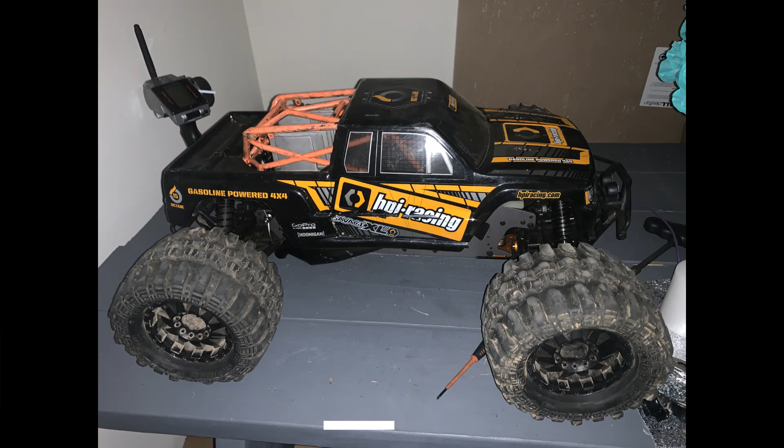Hey everyone, making this video because I recently bought a used Savage Octane. Picked up yesterday from a guy, no more than 15 years old, I think. I'm gonna send this video to him, so hopefully he's not offended. He said he traded the truck for an airplane and hadn't gotten it to run since. Saw it on Facebook Marketplace, made a deal, went and picked it up yesterday, and brought it home.

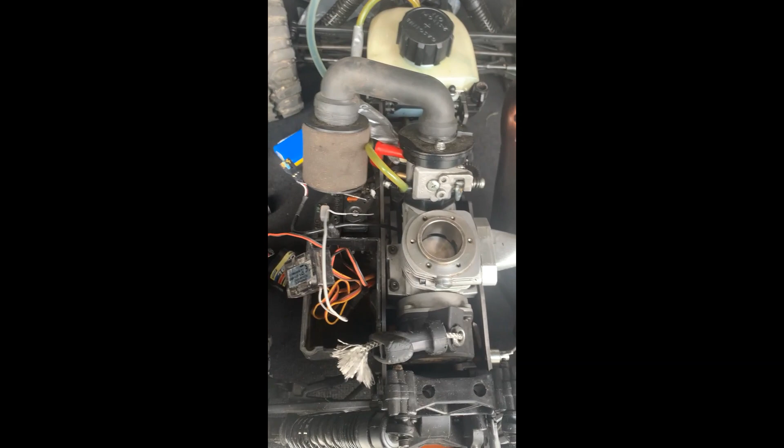Started to check out the truck. I'm gonna do a flip screen here to show you. Yeah, so this is the truck. Again, Savage Octane. It's a gas engine.

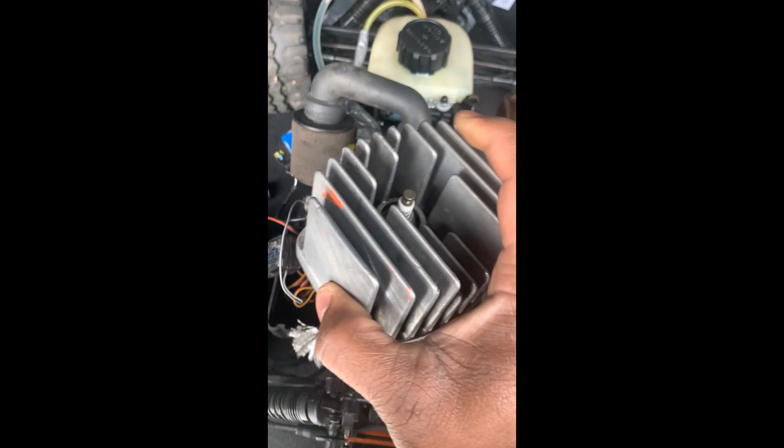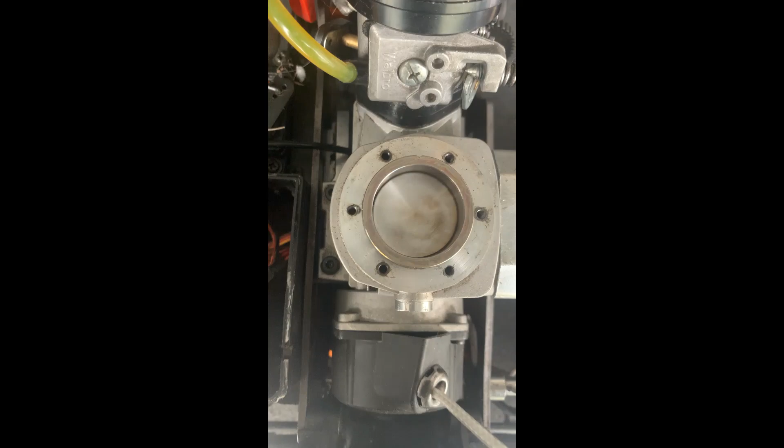He said it wasn't starting, so the first thing I did was take off the head. The shim is there, the head button looks really clean, the piston is actually pretty clean as well. So I'm assuming the piston is fine, because you have to have compression. I don't think that's the reason why it wasn't starting, so that's a good sign. The pull start is working good.

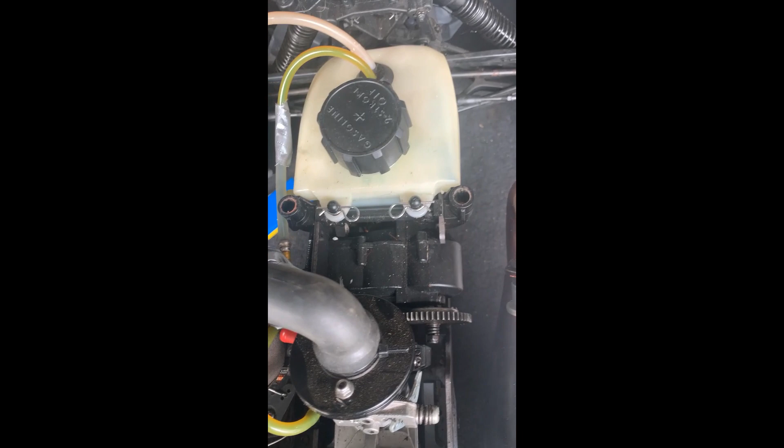What I'm gonna do - I did not get the CDI ignition coil with it, so I have a spare one, I'm gonna throw that on there and try to fire it up. I'm also gonna change the fuel lines and change that gas out, put some of my mix that I have, my 25-to-1, make sure it has the right mixture, and just try to fire it up.

Even if it starts, I'm going to do a full rebuild on this. I'm going to take it apart, take out the carb, clean the carb, take out the transmission, and look if everything is good. May put a new pipe on here, I see it's dented. Header looks fine. I'll know if it's leaking after I start running it, after it goes through a heat cycle.

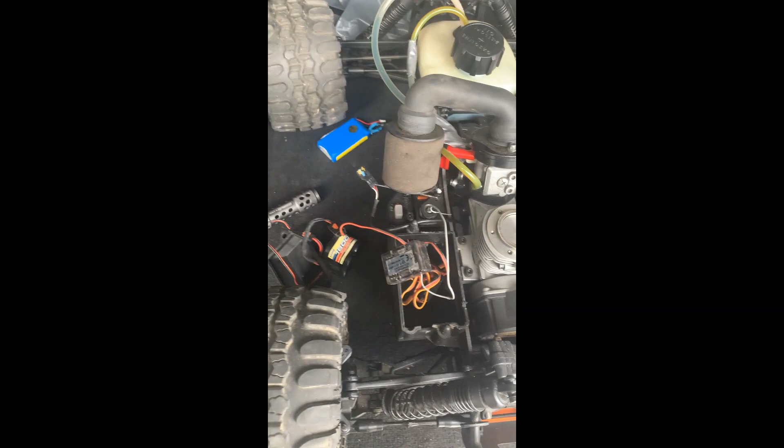But the truck looks decent. The chassis is good. It has a reverse in there. Right now it's locked up, I think it's stuck in reverse. The transmission is spinning freely both ways.

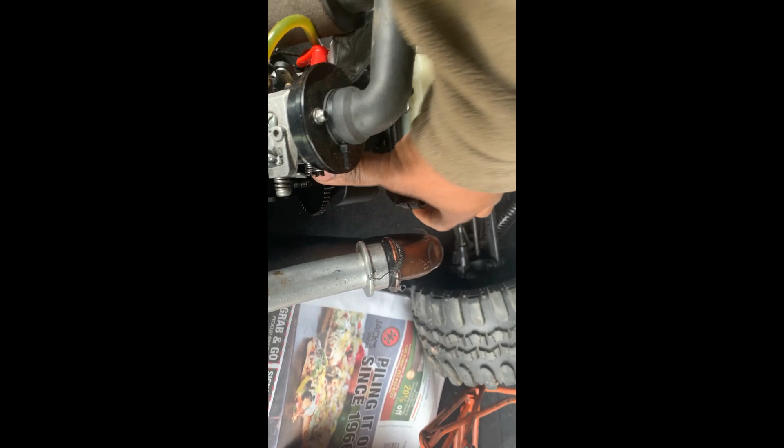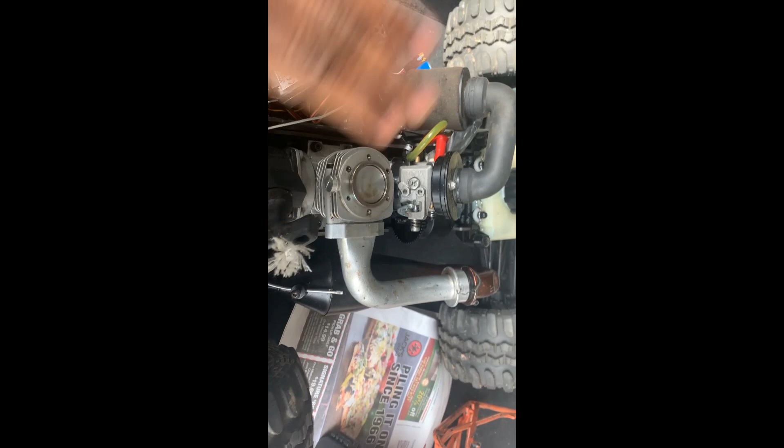So it's looking like the reverse is broken, the reverse module. I'm going to take that apart, I'm actually going to remove it. I have a bunch of cars with reverse modules in them, they can be finicky at times. I don't need it in my truck. I put it in my daughter's truck because she likes to see them going in reverse. That's fun for her. But I'm going to take everything apart, do a full rebuild on it, and see, go from there.

But the first thing I'm going to do, I'm going to get a CDI from one of my spares, and just try to fire it up with some fresh fuel and see if we can get it started. Next video, hopefully we will see it running or trying to get it started up.

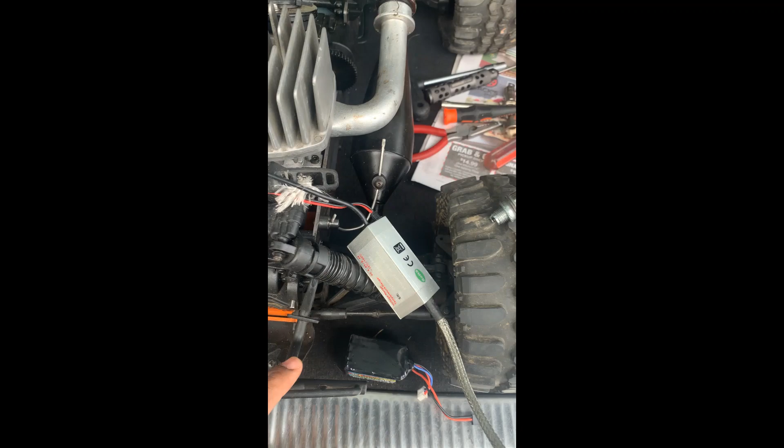Okay, so the first thing we're gonna do is check for spark, to see if the CDI I just put on there will fire up. So this is the CDI, I've connected it to the switch, and the battery goes into the switch as well. You've got your speed sensor connected to the CDI as well. Let's plug this back in.

Hopefully it's the battery - let me use my electron battery instead. Okay, battery is in there, I've decided to use my LiFe battery instead. No, that's charged. We're going to turn the switch on, and then when I pull on the cord, if the box is good and the battery is good and we're picking up a speed signal from the sensor, we should get spark.

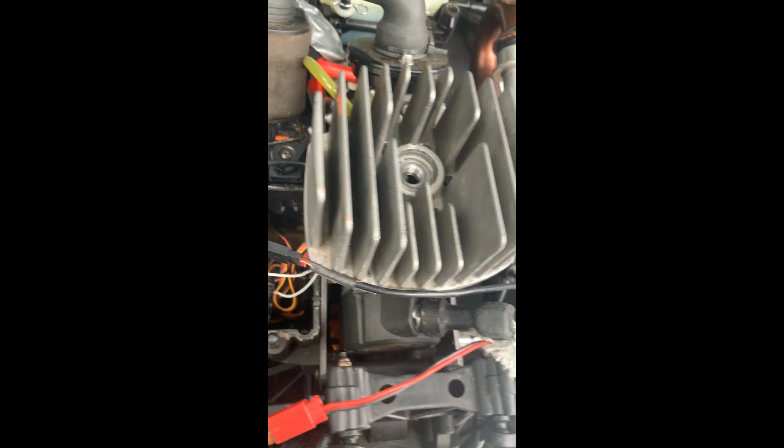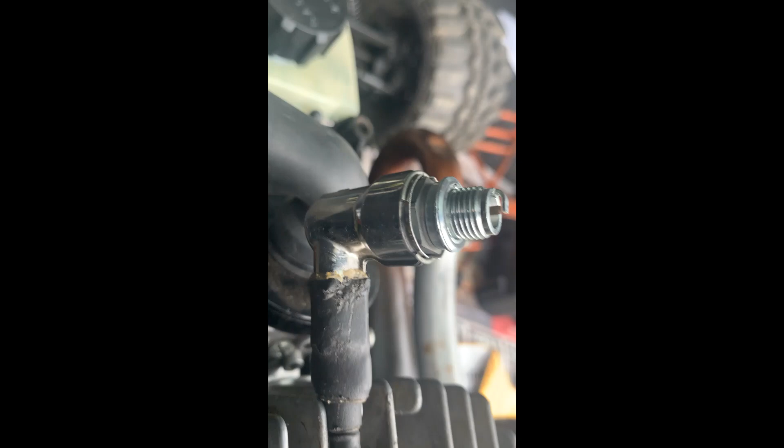Okay, so let's put that there. We'll want to put it in the dark so you could see the spark, or at least hear it. So if I pull on the cord, you should... try to get it into a nice little area so you could see it. All right, let's see if we get spark. I hear it. Where's the camera?

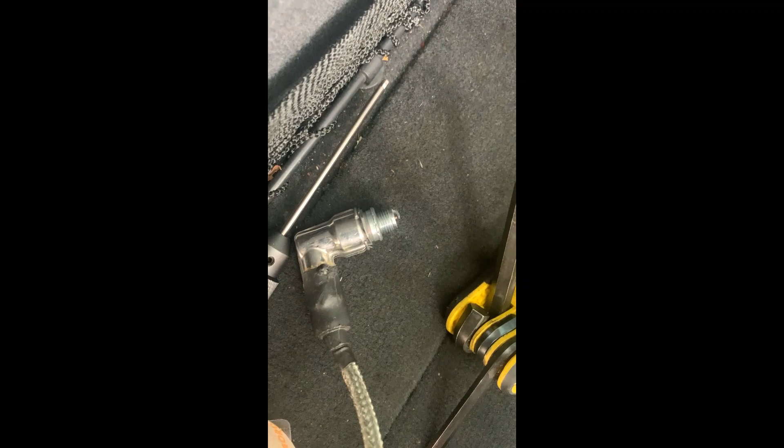So it's very faint, it's very faint. Let me try the battery, switch the battery around. I put it in a darker spot, now look if you see spark. See? Let's zoom in. So yeah, we have spark.

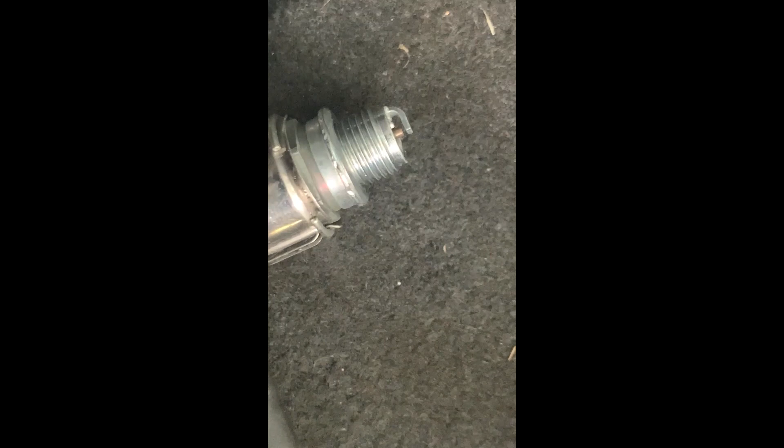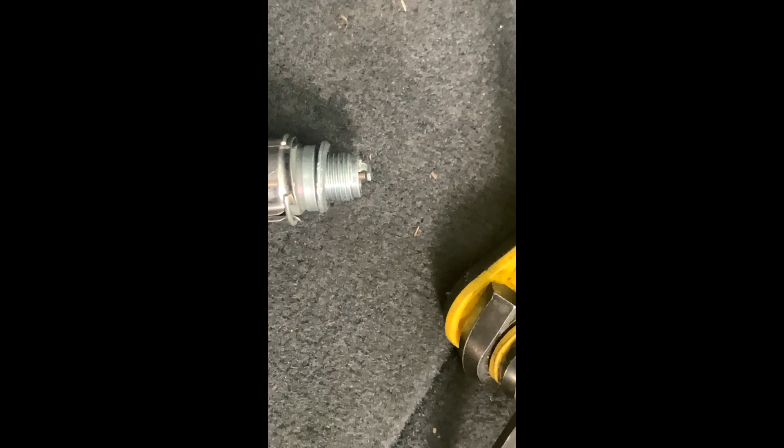So the next thing I'm gonna do, I'm gonna shorten up that gap between the plug and the electrode. Okay, I reduced the gap there, still getting good spark I think. So I'm gonna try to run it with that, started with that spark, level of spark on it.

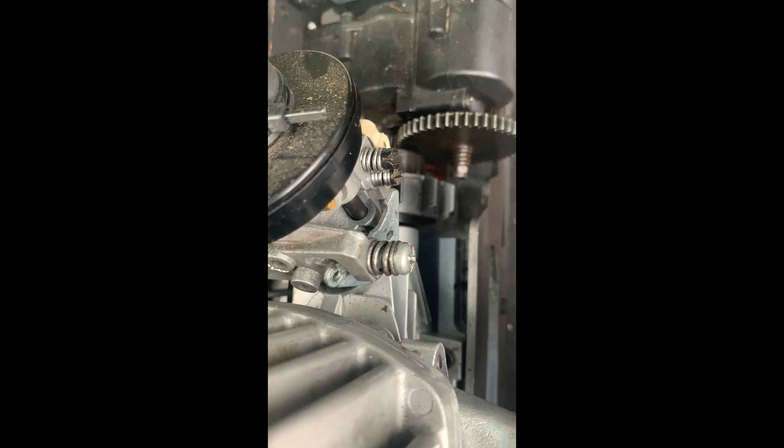What I noticed is the idle screw is all the way in, so I'm gonna back that off, just kind of what I'm used to it being. So if I back it off a little bit - okay, I don't know where these screws are right now, so what I'm gonna do is put them back to factory settings so I know. So, oh, that's all the way in already. So they're actually all the way in, so that's no wonder probably why it wasn't starting.

So what I'm gonna do on the high, I'm gonna go 1.5 turns out on high. I'm gonna let it stay there, one on high. I'm gonna go 1.5 on low.

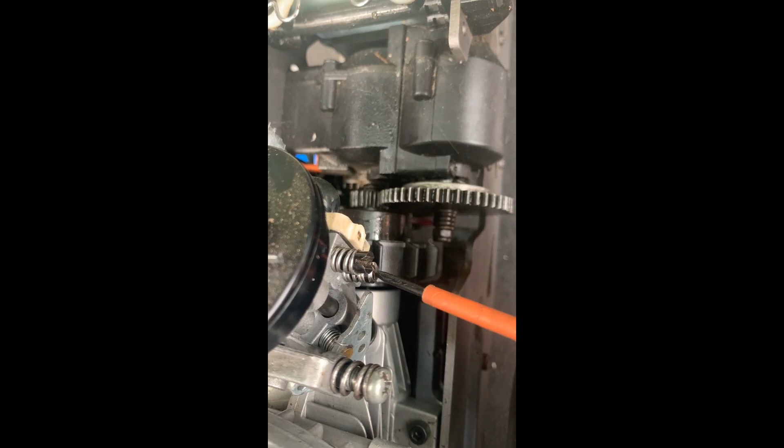1.5. I'm gonna do that for now and see if it will run.

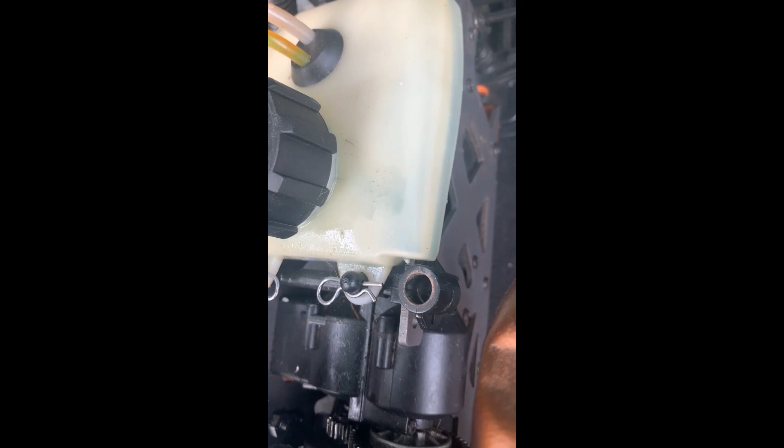The gas here is questionable. I don't know how much oil is in it. I know oil is in it because it has the color. I'm gonna fire it up with this mixture just to see if it starts.

So I'm going to prime the bulb. It seems like it's primed, so it's not... or not. Let's see, it's not priming.

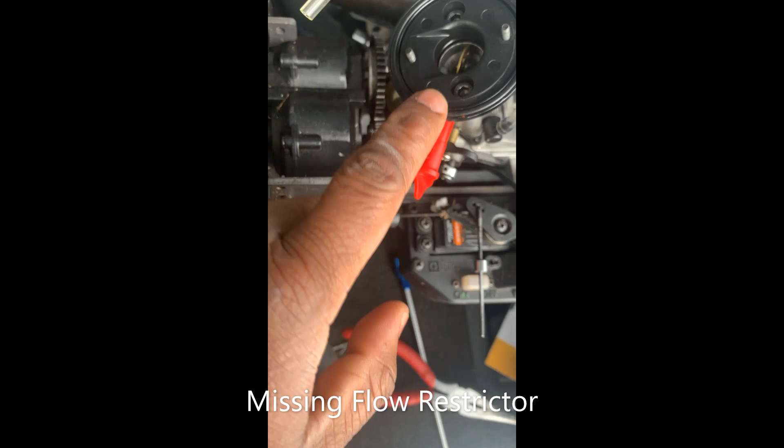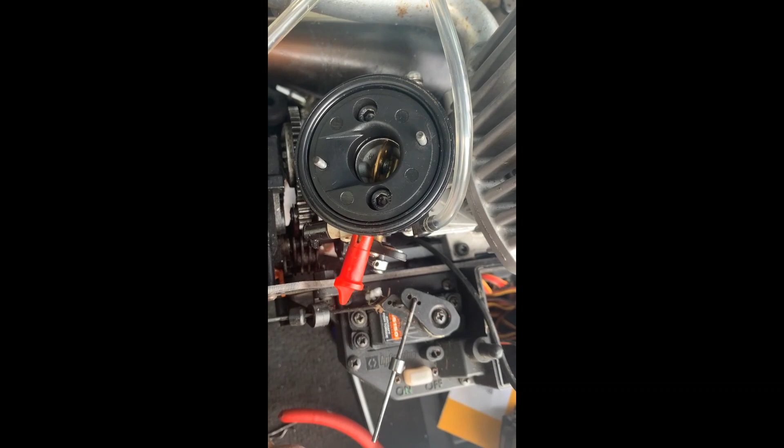So I'm gonna go ahead and change the fuel tubes. Okay, found out that it's missing the flow restrictor, sorry, I call it the honeycomb disc that goes on here. So I'm gonna have to order one of those. I could take it from my truck or other trucks, but I'm not gonna do that.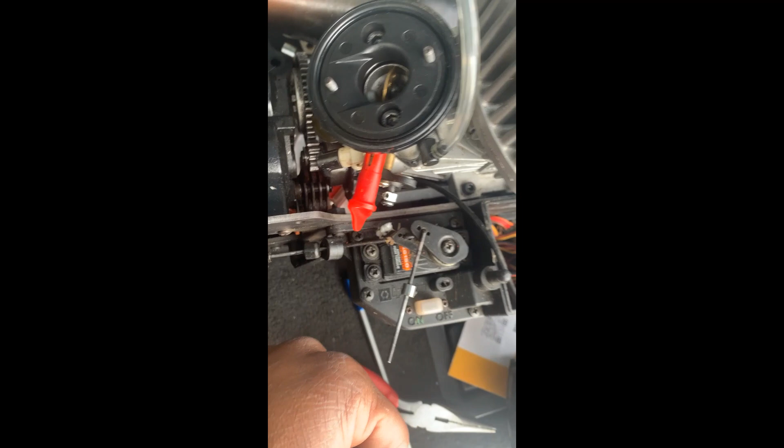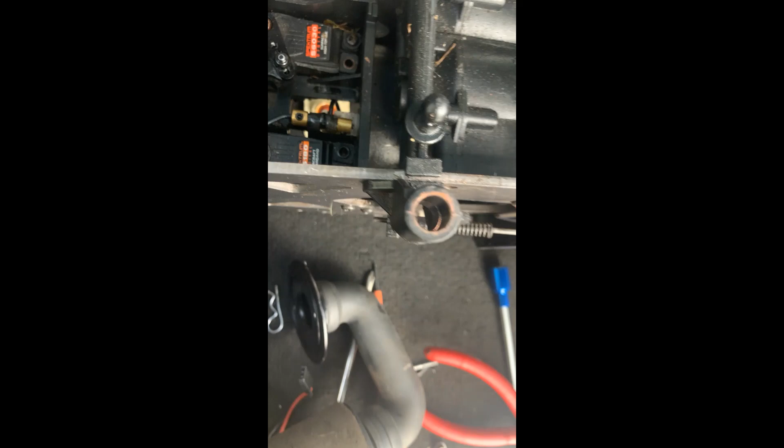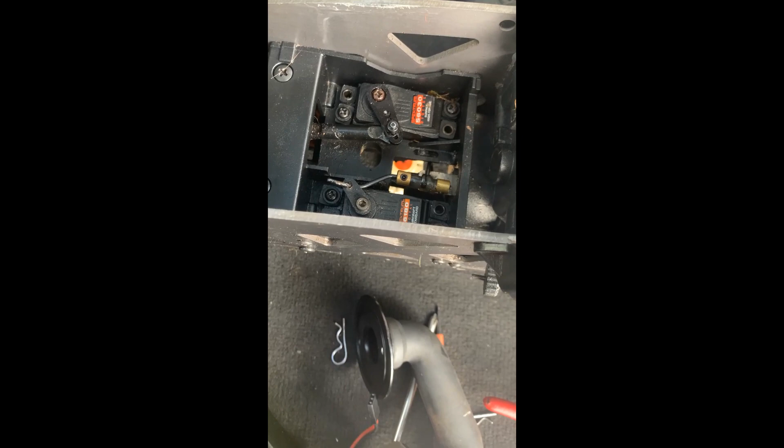I'm just gonna use the time to break this truck down, see if there's anything else that's a problem. It has a reverse module in it, and again, the transmission is not engaging, so I'm thinking the reverse module is stuck in neutral position or it's broken. Truck's not moving, so I'm gonna tear that down and see if I could figure out what's going on, or if the servo is bad.

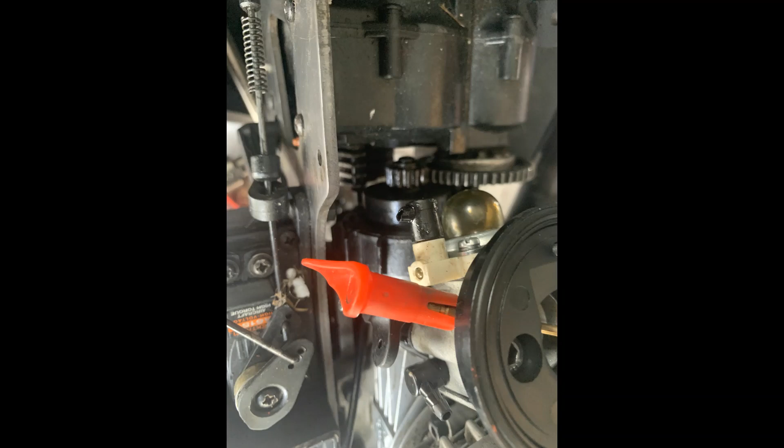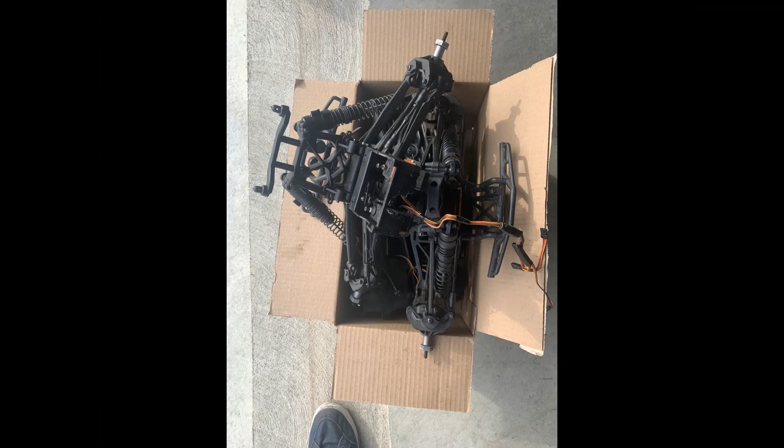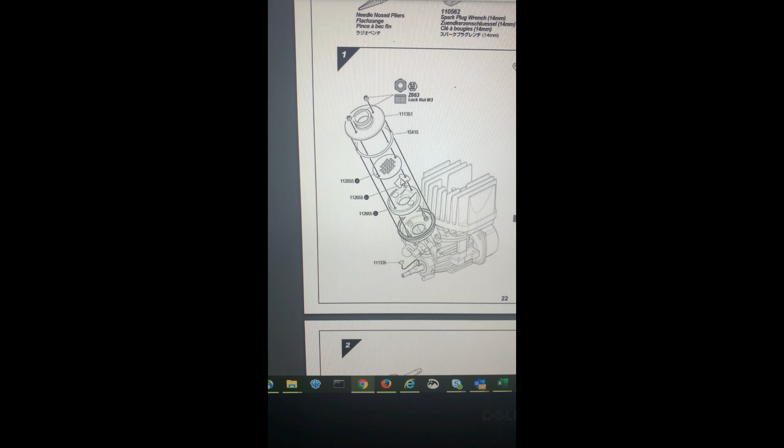The carb is too large for this engine. It's a Walbro 688 carb, typically used on 23, 26, 29cc gas engines. But they found a way to package it on this engine, which is only 15cc's. So it's overcarbureted - that's one of the issues with the Octane.

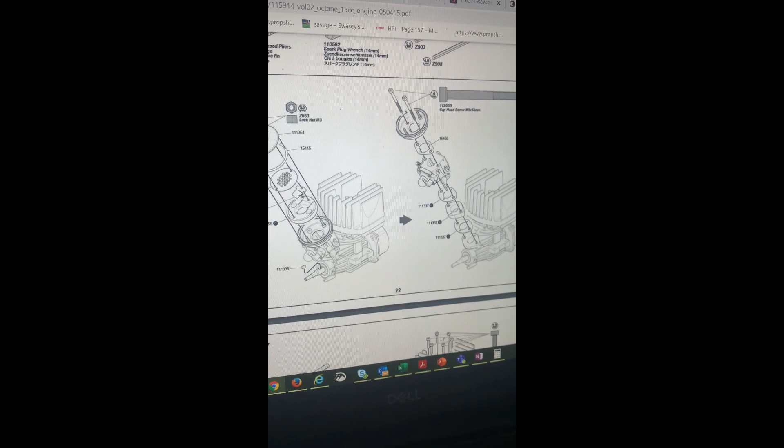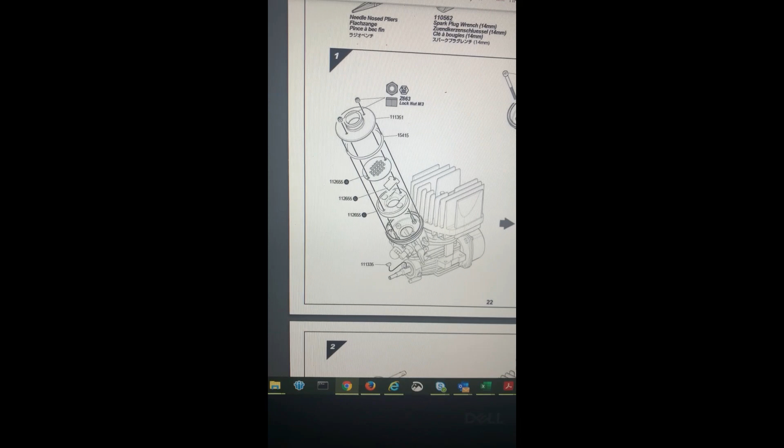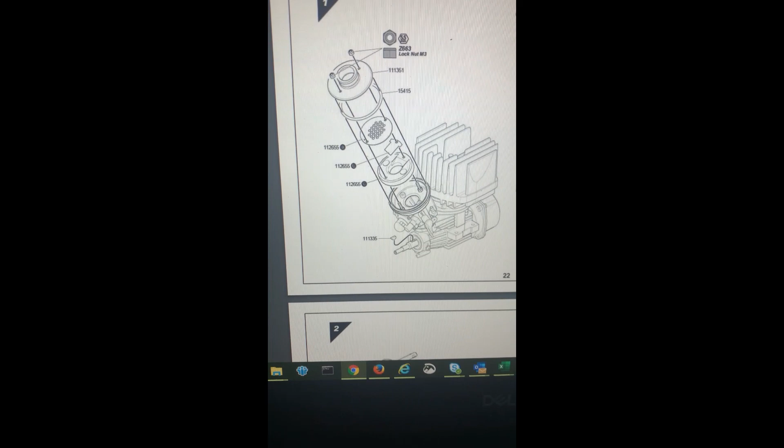HPI 112655. Let's see if we could find it. Oh, wrong thing, what did I... 112655. Yep, so I'm gonna order these right now.

Let's see which is the cheapest. 12 bucks, 12 bucks. I'm gonna go with these guys, they always get stuff in a short time. So I'm gonna order this right now and get it in the truck - hopefully we can have it by next week.

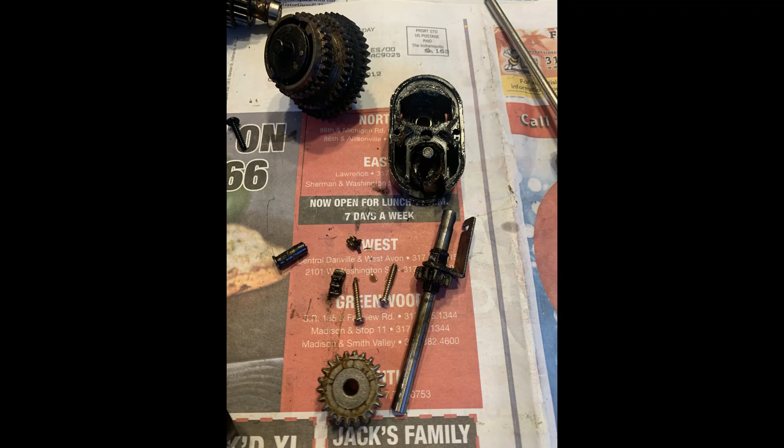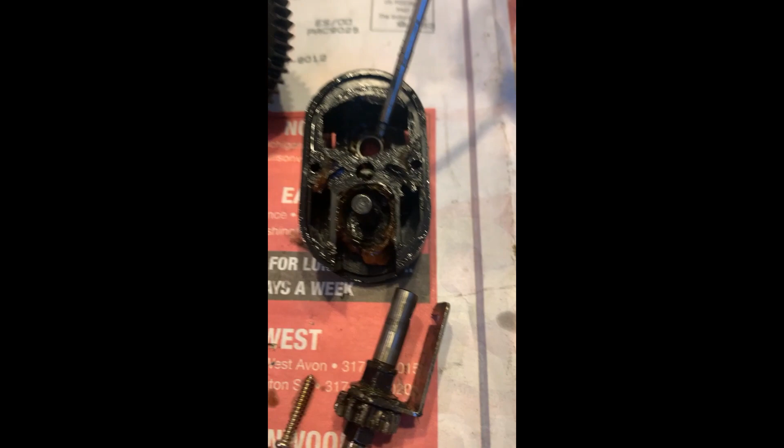So the issue is the idle gear in the reverse is broken. That gear is the center gear here, it transfers the torque from gear to gear. So it's damaged, I won't replace it - I'm just gonna reinstall the transmission without a reverse module.

Now, since I have the transmission apart, this is the Octane transmission. So you see the third gear, second gear, input, first gear. You'll notice that the third gear is much larger than the Nitro 3-speed. So the Octane transmission is actually faster than the Nitro transmission - it has a larger gear.

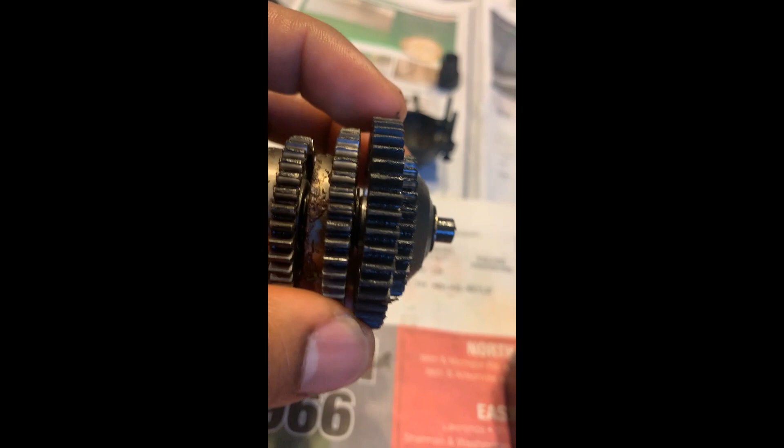Now the gear cluster is almost the same. One of the big differences is you could access - with this two big gap - both the second shift point and third shift point from the side of the transmission. So you make use of the two holes.

Unlike the Nitro V1 version, where you have to take the cluster apart to get to the second gear, the Octane has all these spacers in there for you to get access to the first-to-second shift point, and also second-to-third shift point. That's a good thing with the Octane.

The other improvement is that their drive gear on the center cluster - the idle gear in the center cluster - is hard machined. I've shown you guys the FLM steel kit that has 1, 2, 3 of these gears machined. They're not sintered like these.

But then I had showed you the idle gear with sintered 2-speed or 3-speed. There was no need for FLM to make any more hardened ones because you could use the Octane one here, and it's also hard machined.

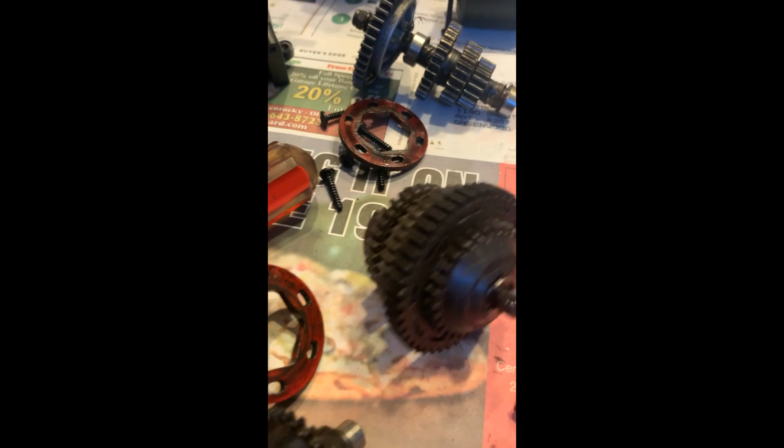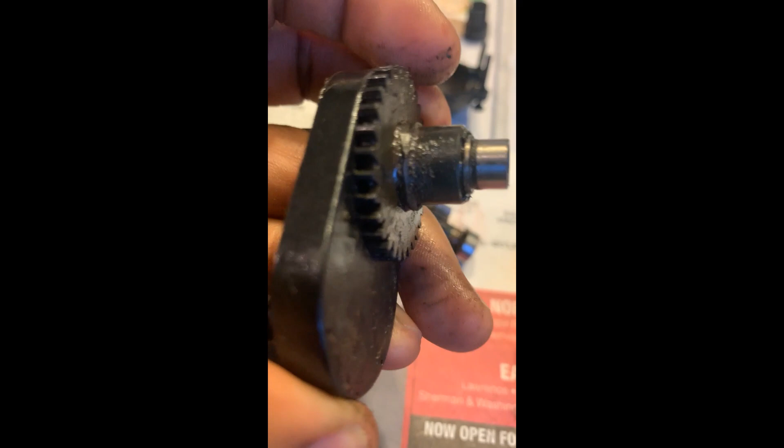And then it would drive on - let's find that other one - it would drive on the lower gear. I'm going to remove it off the reverse module, but this is also hard machined.

The reason why I didn't have FLM make these is because these are already available. Just search on eBay for these - these are the Octane part numbers. I'll put it on the group site also for you to get access to these two gears.

So again, these two gears are already hard machined - you didn't need FLM to make these because they're already out there.

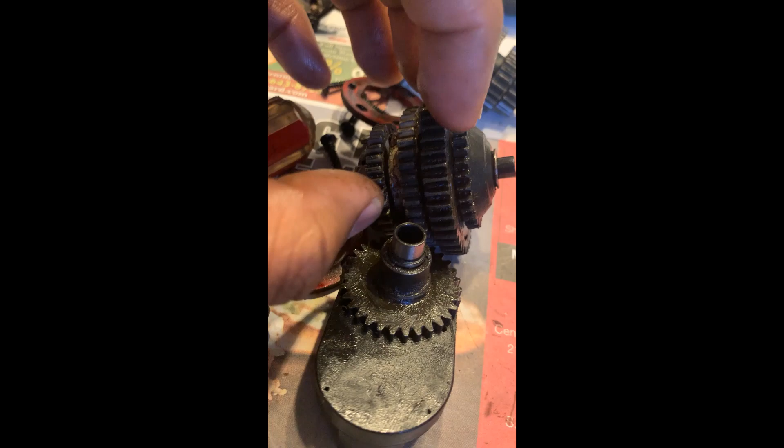So you put this with the gears that I designed and sent to FLM for making, which is available today. Then you get a full bulletproof machined transmission - no sintered gears, all machined.

Already available from HPI, these two - so you do not need to run the sintered 3-speed or the sintered 2-speed gears. And also we've replaced these sintered ones to machined as well.

And you could see the big gap between third and second, again, for the transmission to be spaced out so you could get access to both set screws from the side of the transmission. So the Octane addresses the issue about disassembling the cluster to get to the shift points.